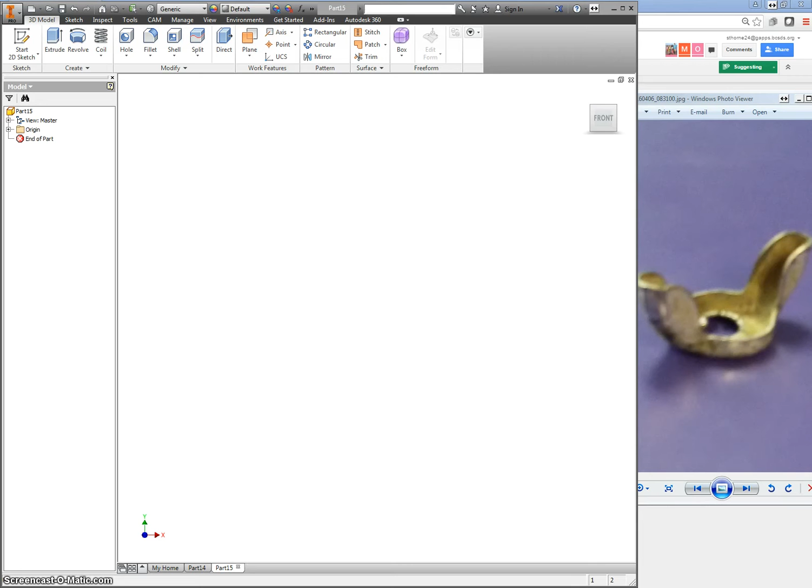Okay, this video is from Max, who's trying to make a wing nut on Inventor. And there's really good ways to do this, and there's really bad ways, and I'm going to show you a way that you can do it. So we're going to start off with a circle. Actually, we'll start with a circle. Another small one inside it.

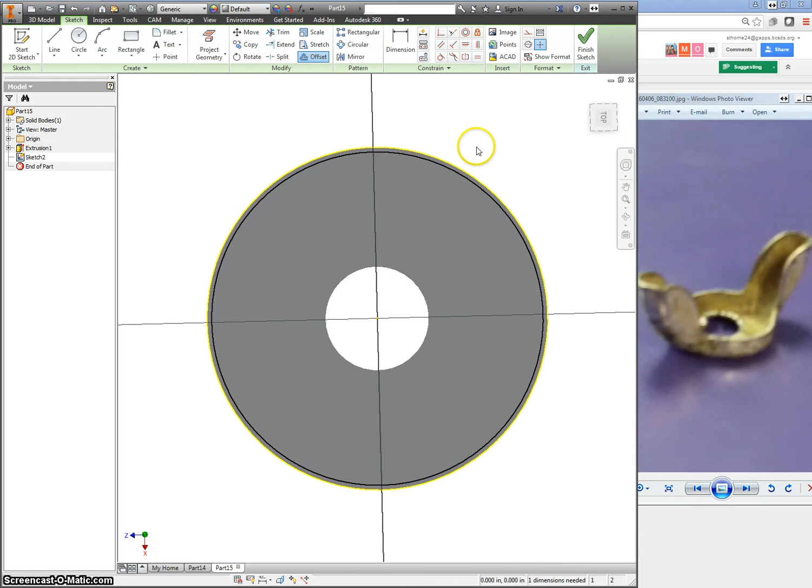We're going to extrude this up just a little bit to get the base of this. And then going to go back into this and make a new sketch. Project the geometry of this, make an offset a little bit to the inside. We'll make this go up a little bit further.

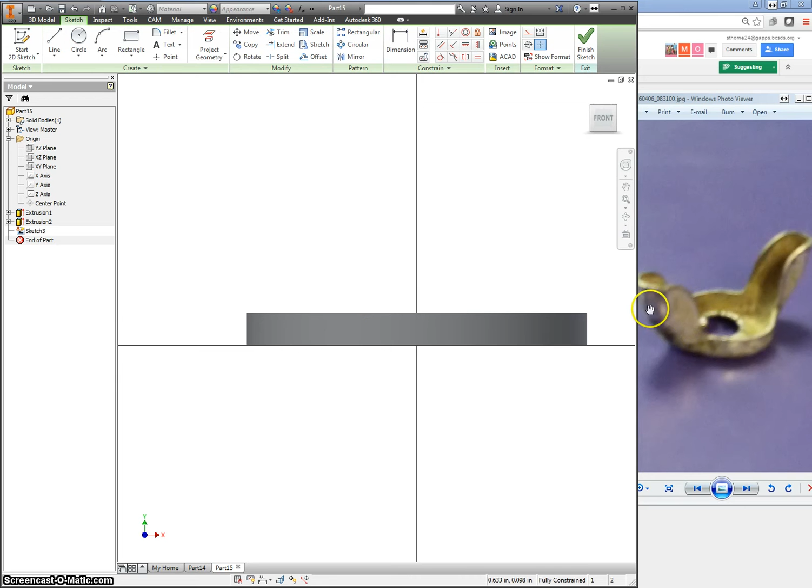Then I'm going to go into my origin folder, find a plane that goes through the middle like my XY plane, make a new sketch on that. I'm going to sketch out what just one of these sides might look like. So I'm going to project this geometry, grab my 3-point arc,

some things that you should do as you're trying to figure out how big this is, probably set up some kind of limits. So I'd use a vertical line, make it into a construction line, and figure out how wide your wing nut is from left to right.

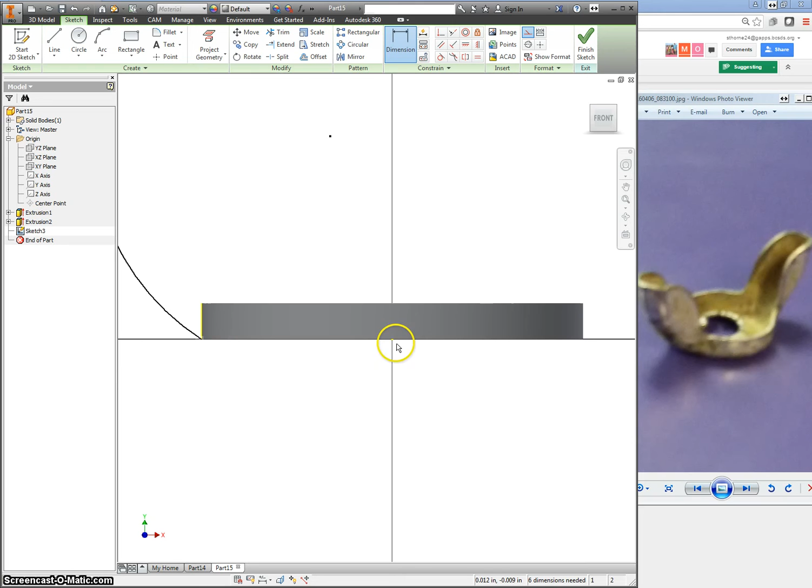And that's not letting me pick the midpoint, so hold on just a second here. Now maybe I can do it. Nope, still doesn't like it. I have to put in an actual point on the origin.

Okay, so if you know the actual radius of this, it's going to be half of this distance if you measure across from tip to tip. So let's say that was 0.7 or 0.625. Now let's go 0.7. Now I can make this curve tangent to this line. Okay? And the 0.7 is giving me from here to here. That's if the overall diameter was 1.4 from here to here. I type in half of that from the radius out. Okay? So there's how big it can be.

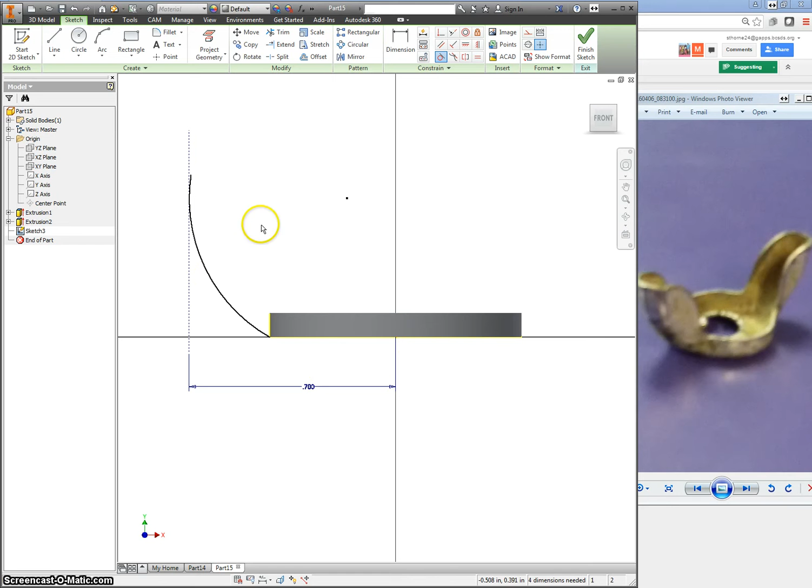Let's also go ahead and just make that tip touch that line. And we'll go back to 3-point arc. We'll put in something else here. It's going to show most of that. And then connect our line down to our base here. Those don't look quite right, so I'll make the line and the arc tangent to each other. And now that looks a lot better, I think.

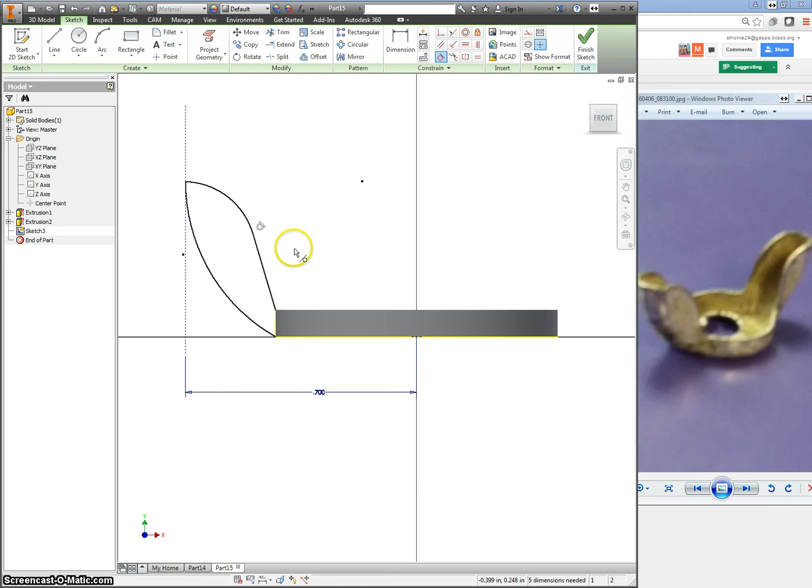Okay. Something else you might want to consider doing. We had set up how wide it is. You can also set how tall it is. So you can measure from top to bottom, whatever this happens to be. You can make this arc tangent to that. Okay, this will get you a lot more in the ballpark.

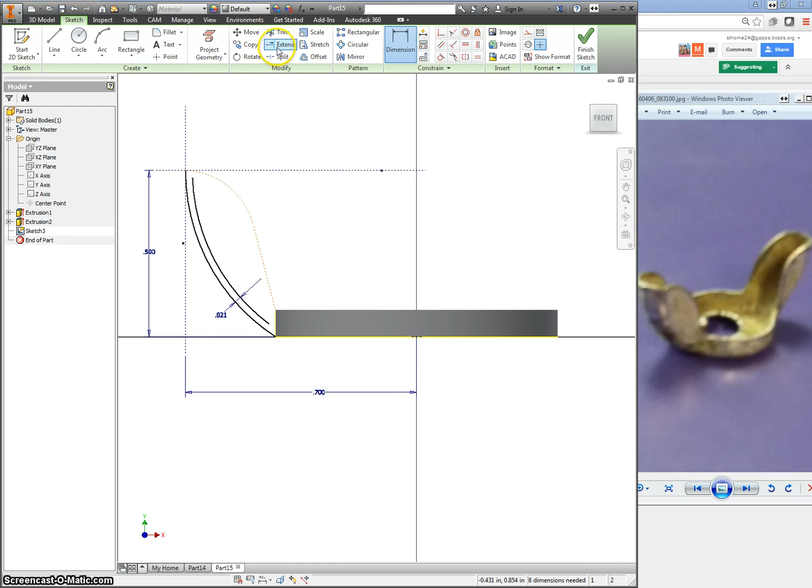Now we are going to ignore this line for the most part. I'll make those into construction lines. I'm going to make an offset of this line, just the curve. I don't care about these. Okay, we want to measure how thick the material is, dimension in between there. Use your extend tool to have that finish going up and down. Use your arc tool to finish the arc here. And use your line tool to connect here.

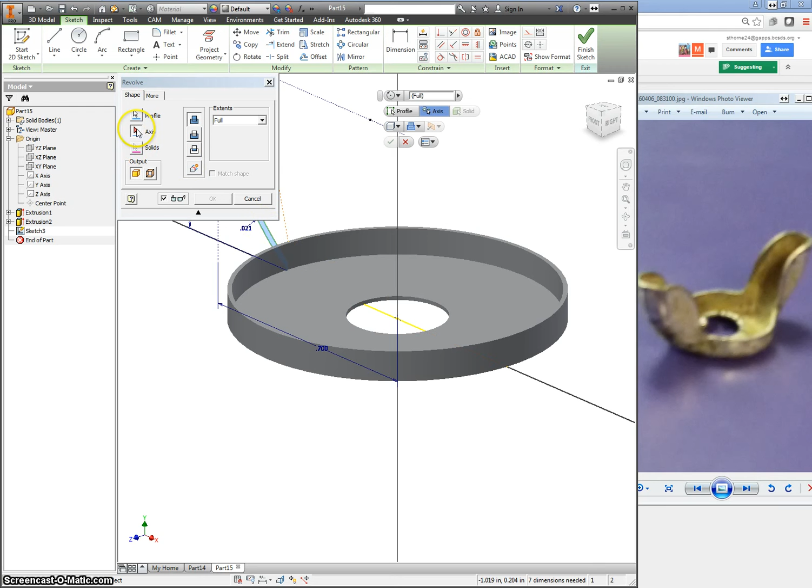You are going to revolve that shape around this axis, and you're going to use an angle, and I'm not sure how much of an angle this would be. Let's call that like 20 degrees. We're going to have it go from both sides, so it's symmetric. There you can see the plane splitting it in half.

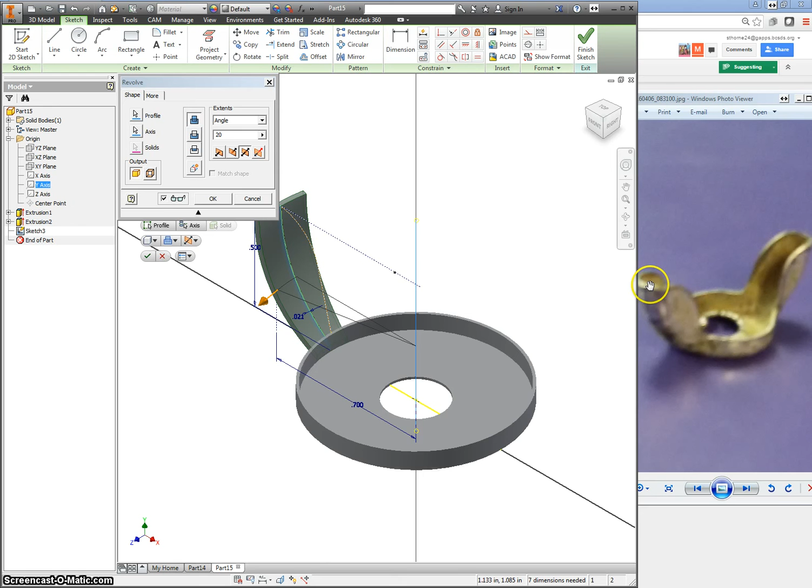This is, if I'm looking at it from the top view, you can get an idea of about how wide that would be. Just make sure it looks roughly like your wing nut, and we can go back and change things later, but this would be a good time to try and figure out exactly how wide that is. Okay, now you have a flat surface on either side. We can make a new sketch.

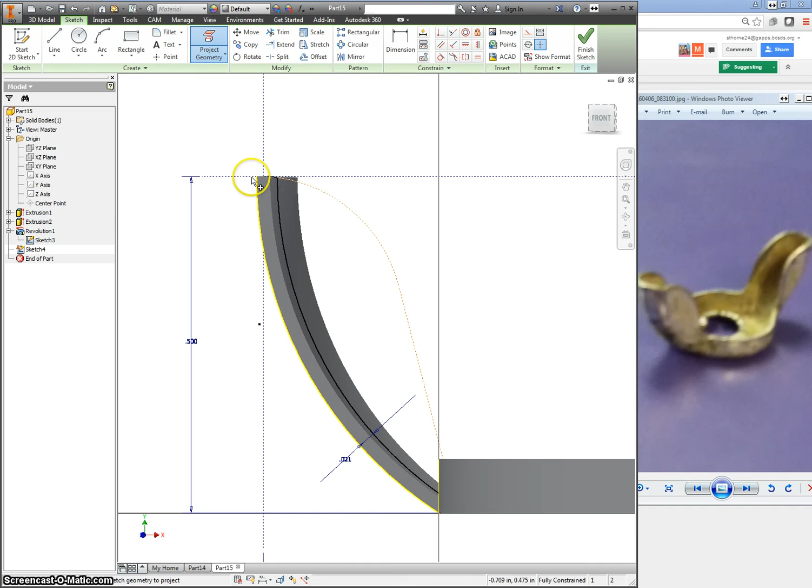And I want to see that first sketch we spent some time on, so I'm going to turn the visibility of sketch 3 back on. That's the curve I was looking for, which I have to modify slightly because now we're on a different plane. Okay, I do want to get that part of it. I'm going to use my 3-point arc, put 1 point there. 1 point's going to be over here somewhere.

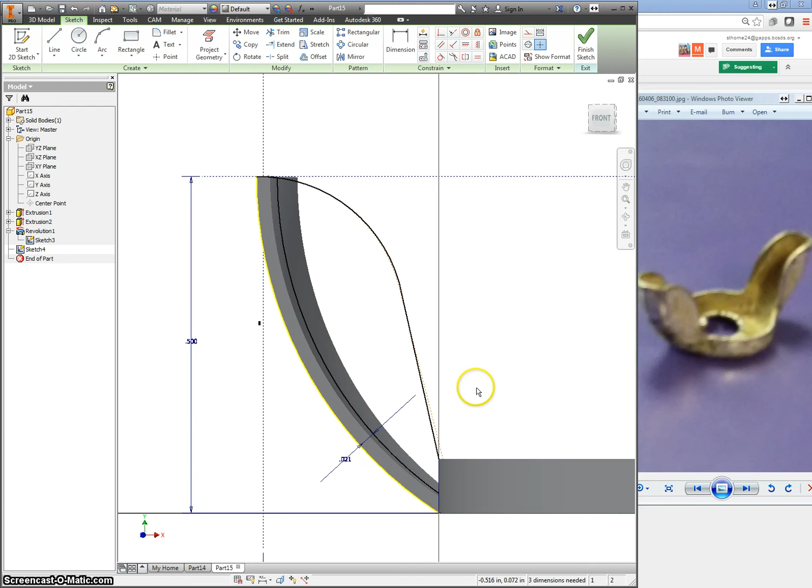This I don't think was part of the drawing. Nope, just the other part. Alright, so now I can extrude this just a little bit. We'll do the same thing to the other side.

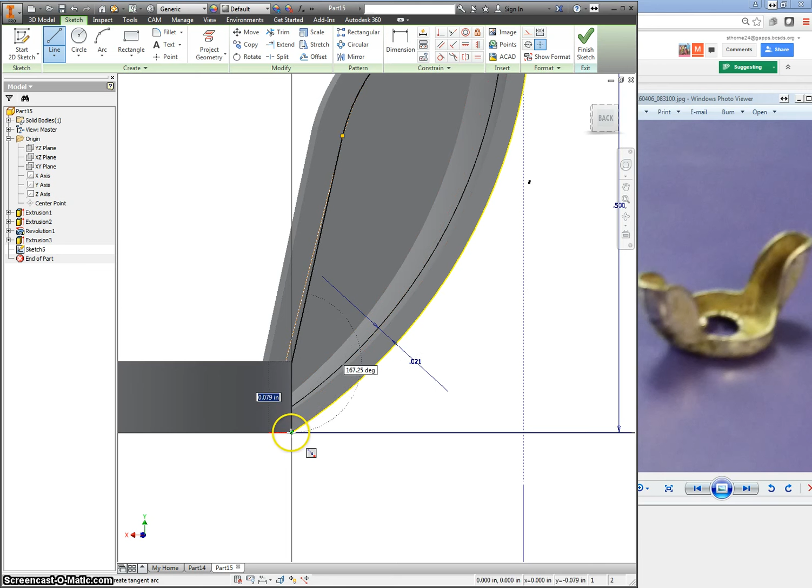Project geometry there. I want to use this curve. I'm going to set one part of my arc there. Extrude that out. Same thing. I'm going to make a mirror of these 3 features, and the plane is going to be this one in the middle. Now it'll give me a left and right half,

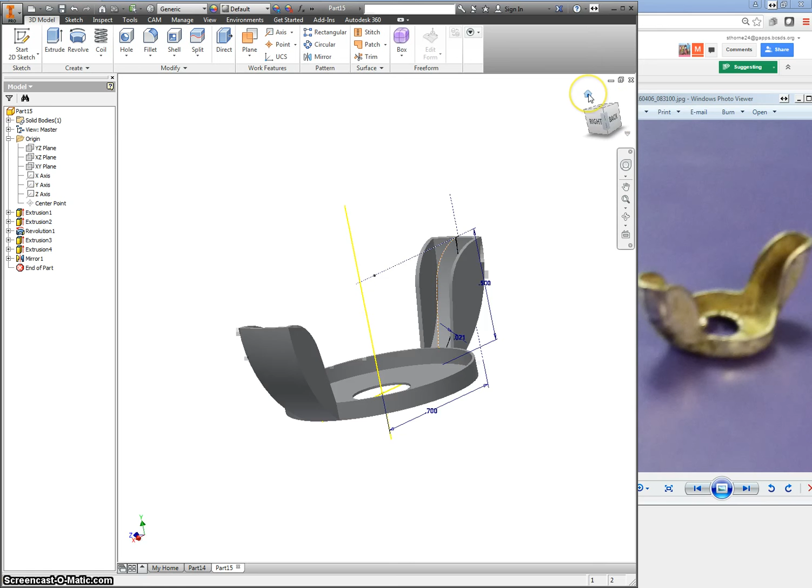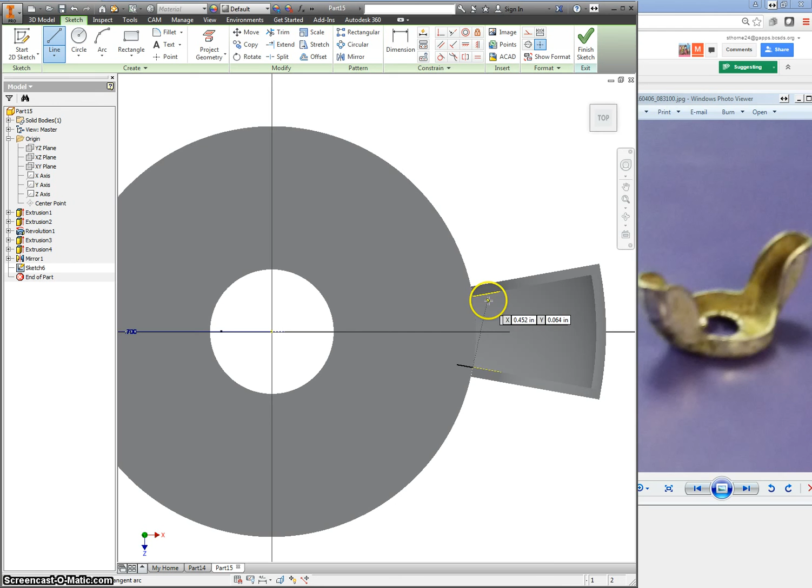and then all that's left is if you want to come in here, make a new sketch on top, show where these lines are. This isn't something we really care about as far as being precise. We just want to follow the same lines that we had before. Click on that, change my distance to 2 next, and cut.

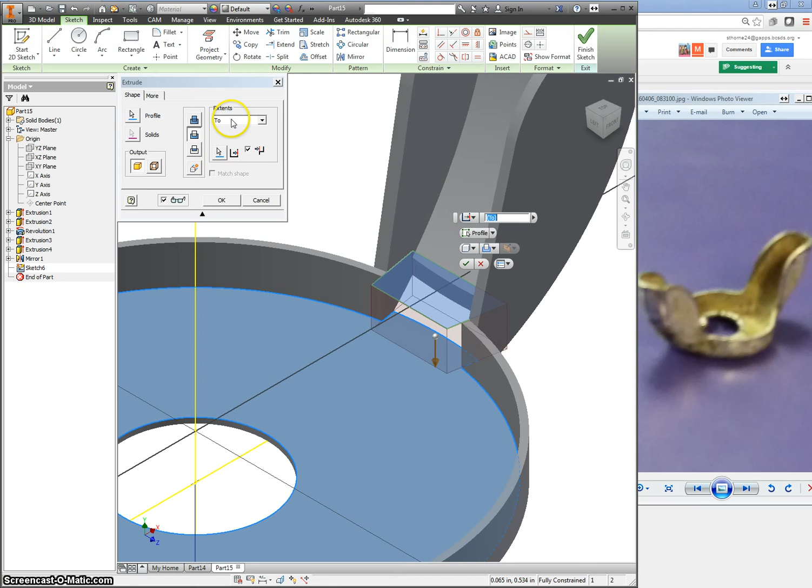Ooh, it doesn't like that. I'm going to say To instead. I'm going to have this be my terminator. Let's change that one more time. There we go. I'm going to click on this surface. So I'm to this curved surface. Click OK. And it kind of sweeps that around.

If you wanted to, you can add a fillet on here. Inside and outside. I have to decide how big of a fillet that needs to be.

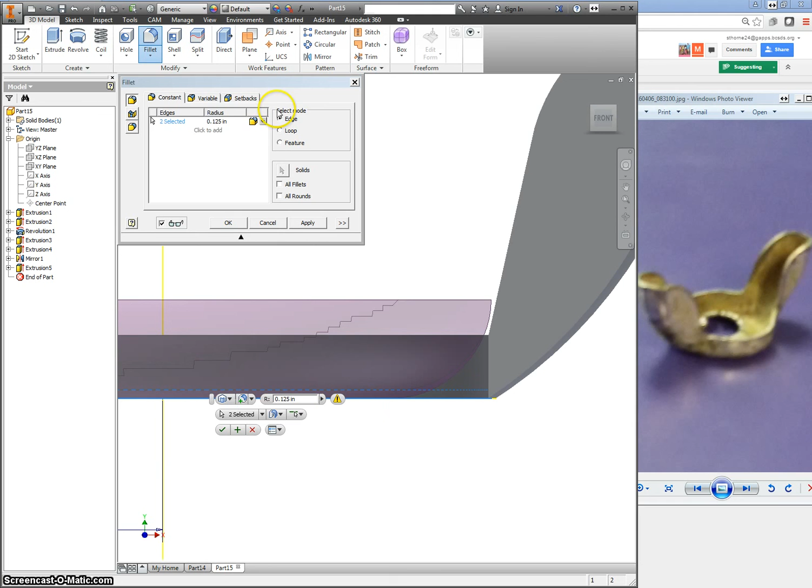And of course, the much easier way to do all of this, which if you know Inventor, you're probably shouting at me by now. Come up here to New, Assembly. You have Place, is what you normally have. You can go and grab something from a folder that you have. You also have Place from Content Center.

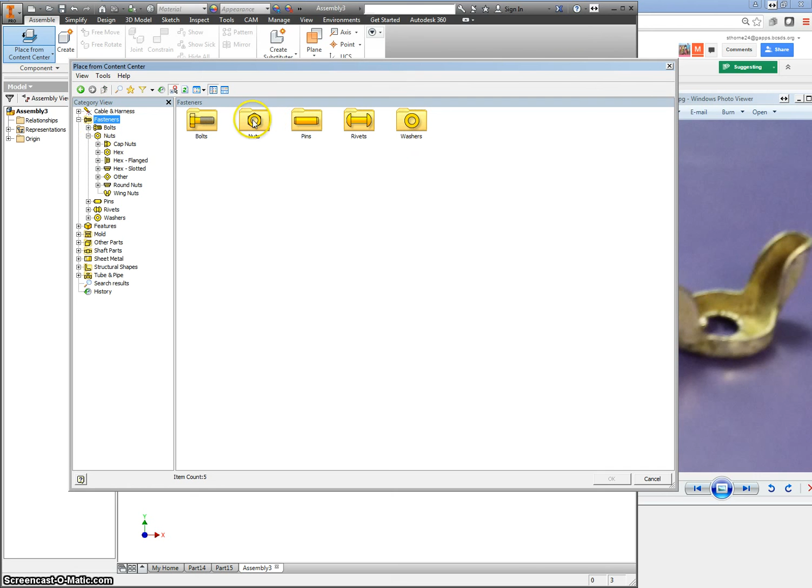Place from Content Center is really handy because here in Fasteners, under Nuts, you have all different wing nut styles. So you have Fasteners, Nuts, Wing Nuts, and here you just pick a wing nut that you might like. These are metric. You have other ones that are inch. You can click OK. We talked about parametric modeling, so let's say we picked one of these.

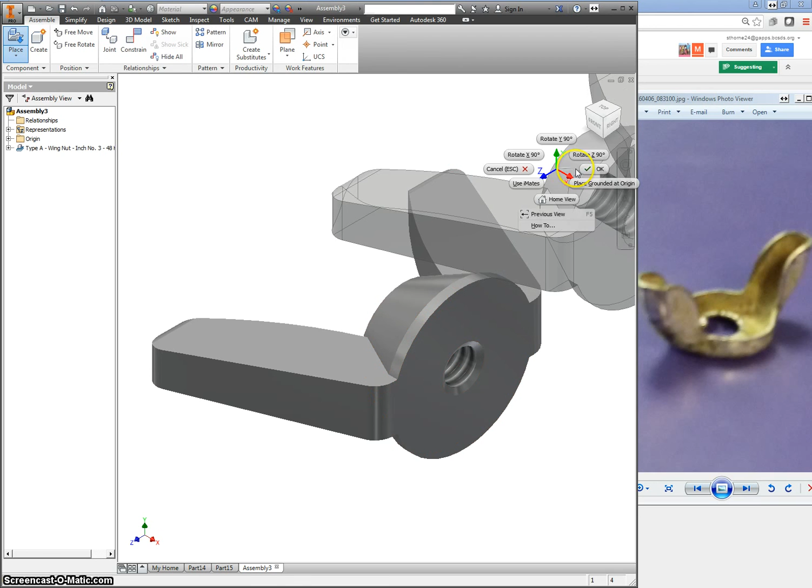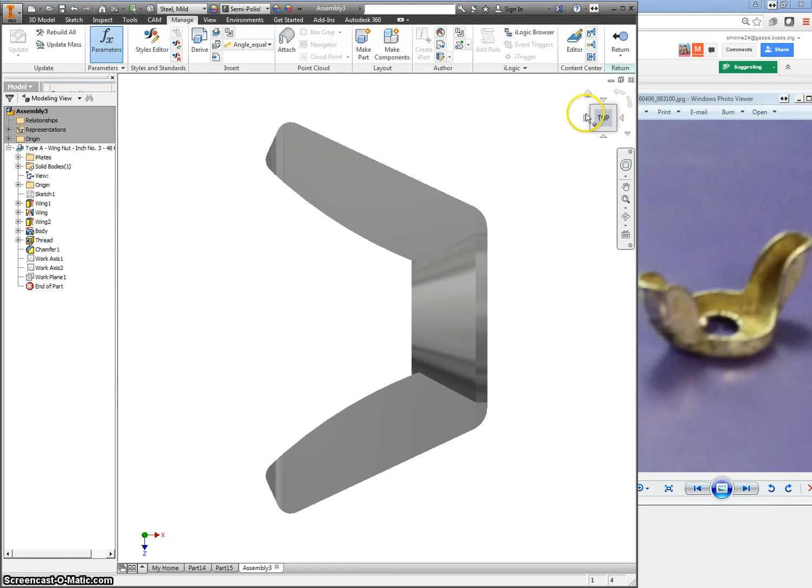If I go into my Manage tab, Parameters, down here at the bottom, head height, width across flat sides, width across the center, radius, countersink angle, collar width, head height, head diameter. You now know what these different things are. You can come in here and change these, modify these, and make this a customized part as well.